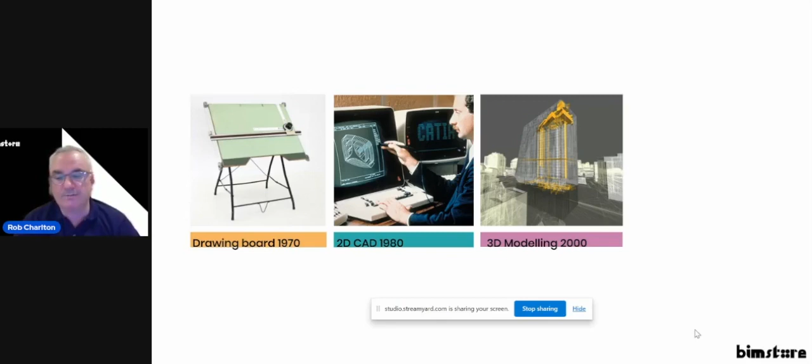That was about 2000, when we saw that as an organization and could see the return on investment. That's what we've seen over the last 20 years - that progress has significantly matured in certain parts of the world. Then in the last 10 years, people have been exploring lots of different things, VR being one of them. I'll touch on some of the new things coming through at the end, but there's continual innovation in a sector that for many years had very little. It's good to see a lot of investment going in and a lot of clever people joining our sector. So yeah, you've gone from drawing boards on the left-hand side - that's a digitizer. I think I just put these slides in because I like these two slides.

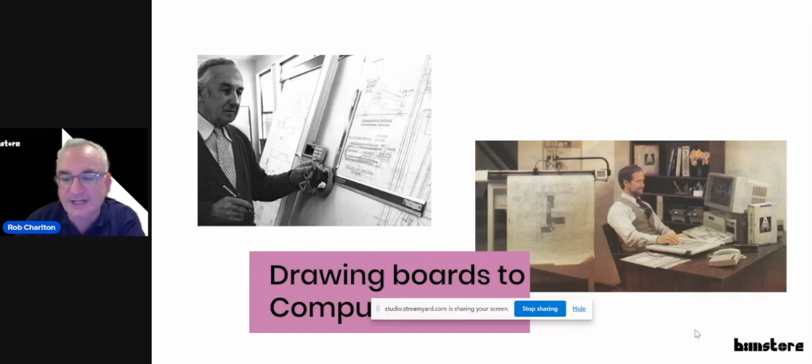That isn't me on the left-hand side, by the way, but that's where I did start out. And then I love the picture on the right-hand side, the guy with the AutoCAD software on his desk, and his digitizer tablet that people probably won't have a clue what that was. And you can see the inkjet printer behind. Quite nostalgic, I think that's why I put that in, just because it's nostalgic for me.

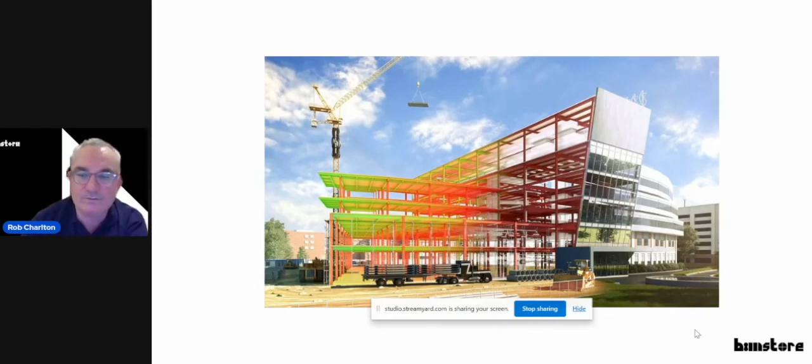But then this is where we've got to now. So this is the link with what a BIM model can look like, and that kind of progress from me on my drawing board to the kind of things that are really just very much standard today.

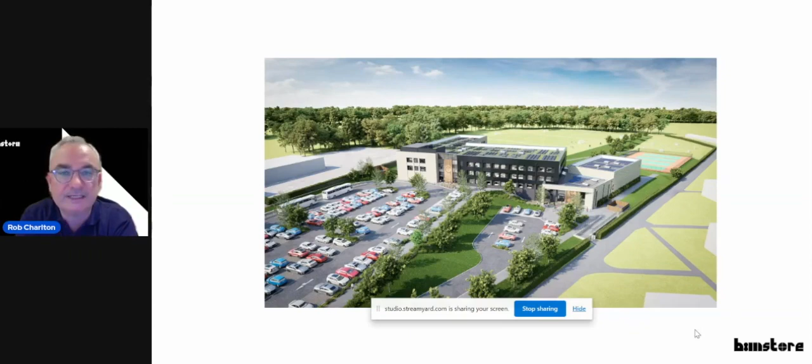Standardized components, and we know exactly what needs to be done. By using BIM, we can produce information really quickly. It's a standardized product largely by the Department for Education. So this is kind of demonstrating where you can get to when you've got that standardization level of sophistication. I think the other big thing I would say is the internal skills of the team are important, that you have people that have used, this is created in Revit, have used Revit for many years.

So then, yeah, just take a bit of a step back to try and explain or define BIM. There are many people over many years who have got really excited about definitions and things like that. I must admit, from our point of view and from my point of view, I'm less bothered about definitions, more bothered about what it does and the practical implication of what we do.

But as a definition, this is pretty simple: it's a way of collaborating, visualizing and managing information in a 3D environment at times, and it helps with efficiency and communication. So that's what we're trying to achieve with BIM. And we'll see it change every day, and the opportunities continue to grow.

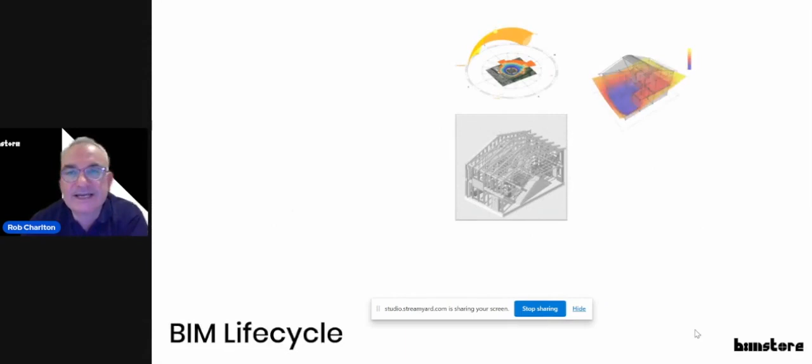So this is a nice diagram that shows BIM isn't just something you use at the construction stage. If you've got a model, you're effectively building the model throughout the whole design process. And the way I always like to think of BIM is you're effectively building a database.

So the first image that came up was how you can use your model in the software for analysis at the very early stage of the design, sun path analysis. You can then move it into the next stage where you can look at heat loss calculations, heat movement. You then move it into creating design.

The black and white image on the bottom right hand corner, that's using it for offsite fabrication. You then get right down at the detail at the bottom of how you put the building together. The next one around is showing how you can use the BIM model for logistics and movement of plant.

And then we'll move on to how every individual component has lots of data, so you can use it for ordering materials, measurement, and then finally using it for operation and maintenance and the building in use. So you can see how the model completely grows, evolves, you add information to it. You're not just using information once.

And I think just an example of that, going back many years, we effectively banned SketchUp in the office. One of the reasons is that SketchUp is a brilliant tool and it's really fast, but it'll only get you so far. So what we were finding was people were using SketchUp, getting to certain stages, like getting to planning, and then having to start again. So the beauty of using a BIM approach is that you're constantly building on the same information and growing it over time, so you're not wasting it.

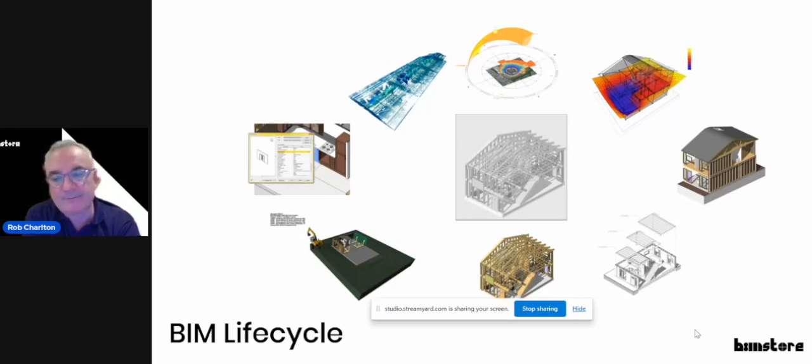So there may be, in any modeling, a need for increased effort at the front end, but actually you get that back many times going forward.

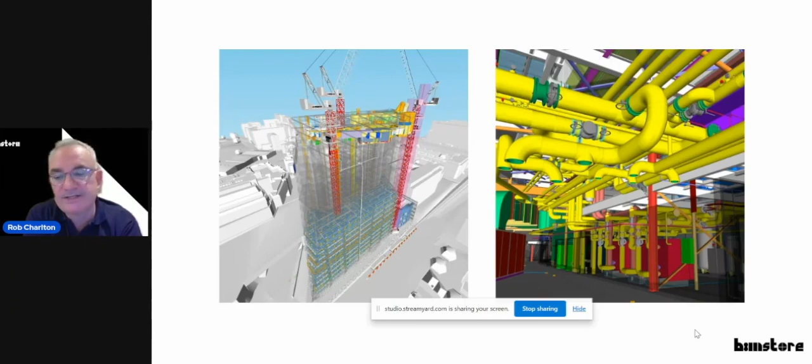And then just a few examples: this was a building delivered in London in 2011, 240 Blackfriars, just off Blackfriars Bridge. You can see on the left hand side it was used for the logistics, very much so, and then this was a really tight plant room. So you can see how the plant was coordinated, managed, and this is sort of 10, 15 years ago. Ultimately, this is the kind of buildings that are delivered now using BIM. And certainly that was a very early adopter client in London who's gone on and uses it now as just part of everyday business.

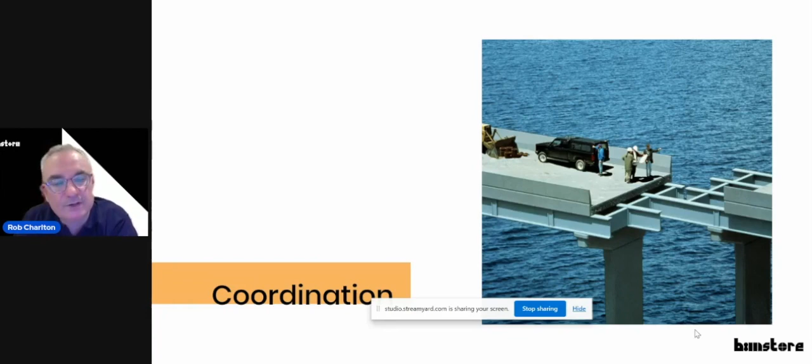But coordination - a lot of the challenges with construction has been, and certainly in the very early days when I was creating 2D drawings, you wouldn't know if something was coordinated until it started to get built, because you were looking at 2D plans, and it wasn't until it all came together. So one of the great things about BIM is that you're bringing all of your pipes, wires, and structure together.

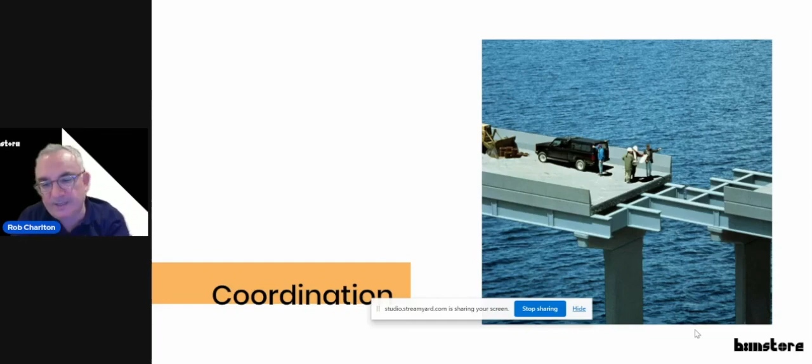You can coordinate it off-site rather than a fitter coming on site and seeing that the pipework is clashing into the steelwork. So coordination is important, and these are just some typical examples of the kind of things you find when doing clash detection - hundreds and hundreds of clashes in models, resolved far cheaper than on site. So talking about return on investment and why BIM, the amount of money and energy that saves is huge.

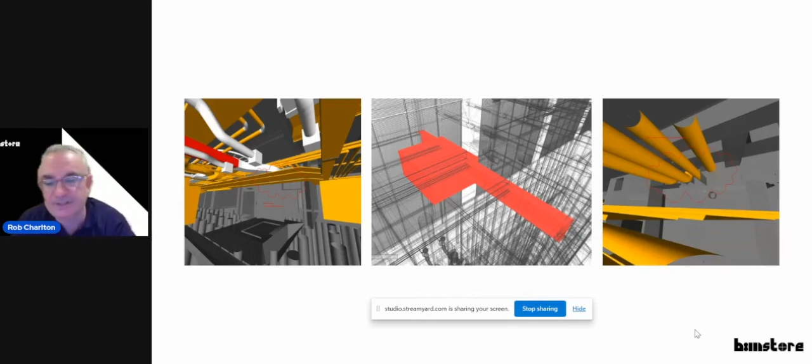Waste - this ties in with the previous point of coordination, but by getting things right first time we can reduce huge amounts of waste, managing the size of materials, getting boards the right size, getting things right first time. I think that's one of the big things we've seen with a lot of live projects - it's made the whole process more efficient. It's helped with offsite manufacturing because you can get things designed offsite for factories and things like that.

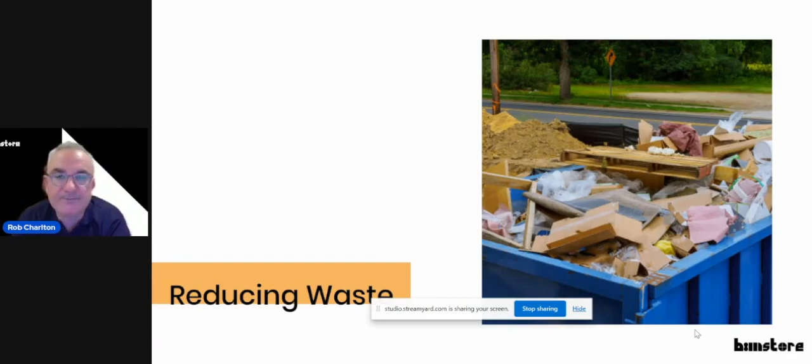And then sometimes overlooked, but communication - something we take for granted maybe now - how we can walk around buildings so easily now. We can understand them before we get anywhere near the building site. We can test things.

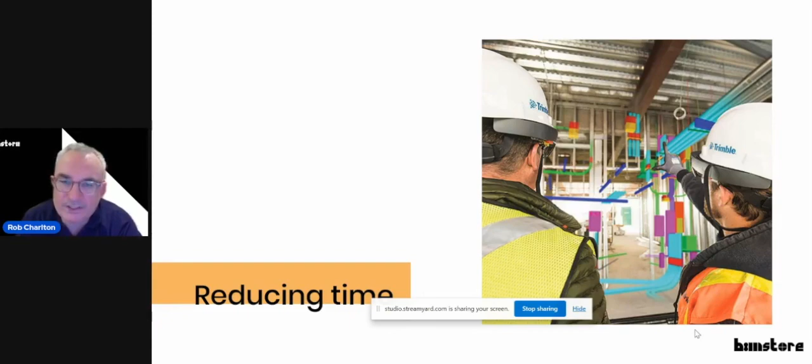And then the whole time element, reducing time, planning offsite. This is a great example of where Trimble are overlaying virtual pipes over an existing building. You see there they've got VR goggles on, looking at how things are all fitting in the same place. So there's lots of different ways that a 3D model can help reduce time.

So how building owners look after buildings, what they have to do, they have to be a lot more flexible. And I think digital construction and BIM can certainly assist with that.

I'm referring to the UK here in particular, but the rest of the world has had similar disasters. Grenfell was a dreadful thing that happened in the UK - 72 people lost their lives, and a lot of that was around, not all of it, but the construction sector played a significant part in the responsibility for what happened there. Now, probably a bit late - it's certainly shutting the gate after the horse has bolted - there's a lot more stringent compliance requirements, certainly in the UK for high-rise buildings, but other buildings as well.

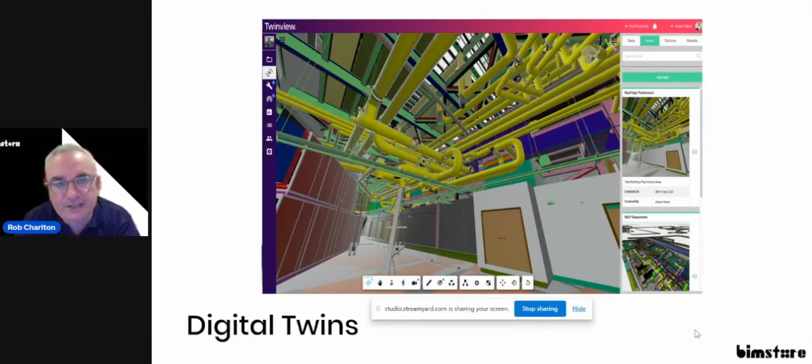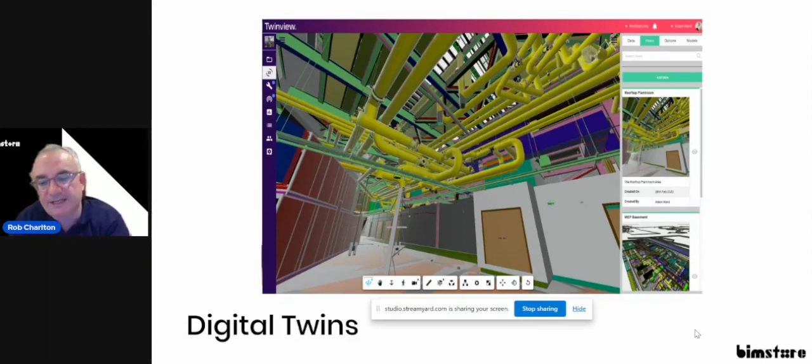And then, as I said, this is not supposed to be a sales pitch for TwinView, but digital twins are very much of the moment. There's a lot of talk about digital twins. We spent the last probably 7-8 years developing TwinView, and it's got to be a digital twin that adds value. Where we're seeing digital twins is taking the information that's been produced, these fabulous models that have been created through the design and construction, and then using them into operation, because that's when they really can start to add operational value. So having an easy way of putting them on, making them accessible, and then adding all of the data. So we see digital twins over the next few years continue to grow.

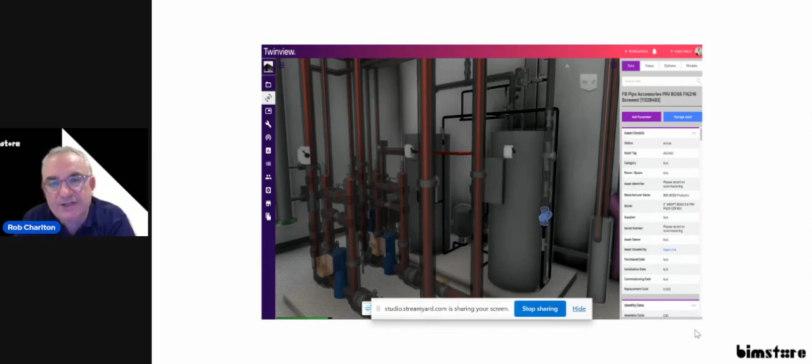So here's a good example of all of the effort and energy that designers put into creating a valve and all the data. This is demonstrating where that has value. So in a platform like TwinView, you can see sort of bottom right, there's a little blue valve there. All the data is on the right hand panel there about that particular valve. So when it's changed, you can maintain the information, and that will continue to grow.

All of your information is in a browser, accessible. This isn't state of the art, it's kind of what's happening now, it's out the box, been around for a few years. So this is maximizing the value of the investment in BIM through design and construction.

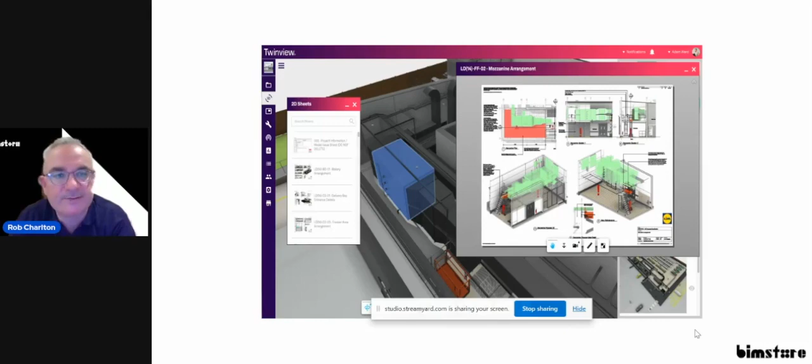And then you can connect that up to your building management systems and get all of your operational data, which, going back to the sustainability side of things, is important to a lot of building users, particularly when energy costs are increasing and people want to get their carbon usage down.

And then you can start to see how, by taking that usage information, how many people came into the building, how the meeting rooms were used, with sort of temperatures, weather, you can then start to apply artificial intelligence to identify patterns, what you need to do to optimize it, make the building more efficient, reduce costs.

That's certainly coming. And another big area that's been evolving over the last probably 5 years is generative design. Probably over the last 18 months, there's some really interesting products coming out that have a commercial position. We've been looking at a few of them, but really good for quick optimization, feasibility studies, and there's more and more products using this kind of technology.

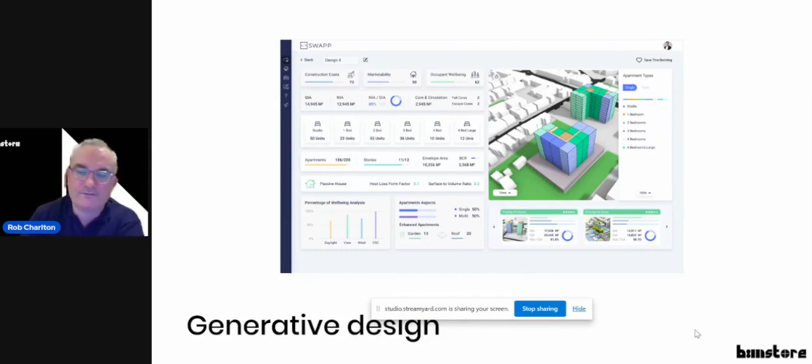And certainly for early stage, we've used it and found there's good value in it. So I think over the next few years, we'll see a lot of generative design coming through.

And then our friends at Apple, spatial computing, it's a bit of a question mark. Who knows what this could bring, but the potential you can see for the industry is really interesting. Taking these models, using things like what Apple are developing, you can see the investment, millions, if not billions, going into AR and VR technologies.

And then, finally, the artificial intelligence element of our industry is probably going to have the biggest impact over the next 3 to 5 years. Already seeing some really amazing results from a lot of information. A lot of the things that we've been doing for many years, we're going to be able to start and look at learning from what's happened over the last 10 or so years whilst we've been collecting data.

So I think that's me. Covered a lot of ground there. Thank you for continuing to listen. If there's any questions, I'm more than happy to talk us through.